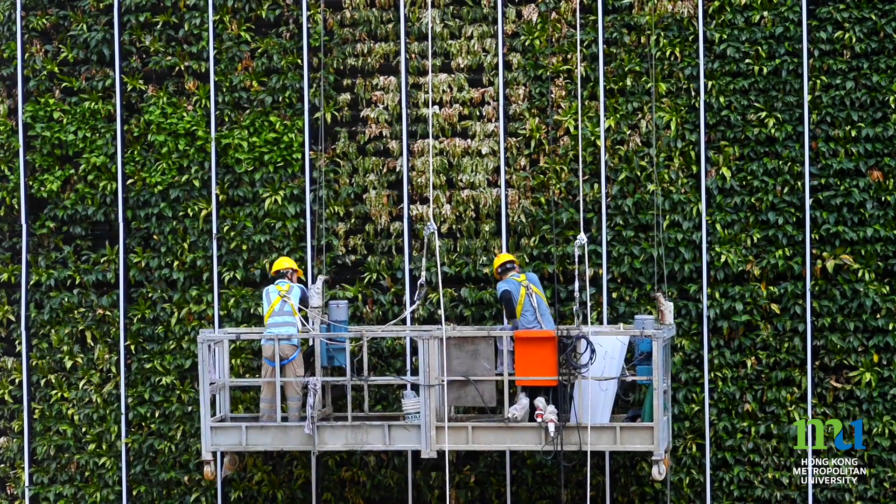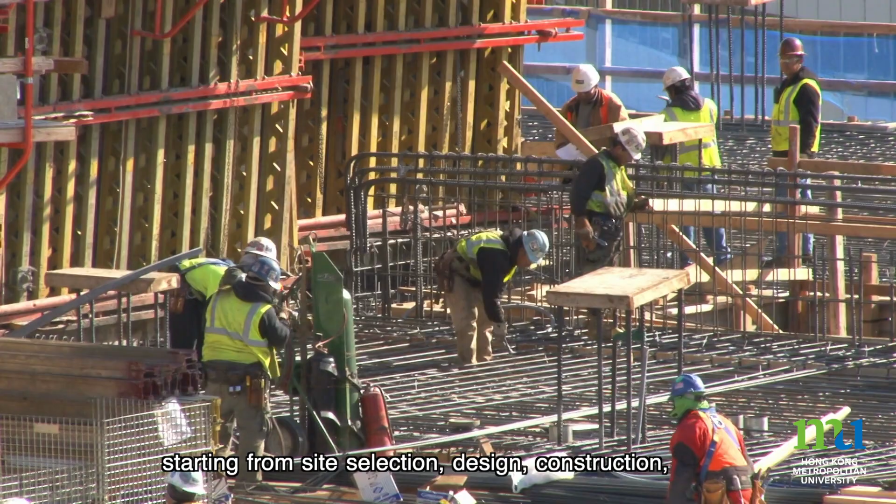Now, let's turn our attention to Kevin Chu, who will shed some light on the definition and significance of green buildings. Many people might associate green buildings with features like green walls and solar panels. In fact, the concept goes far beyond aesthetics. Green building is a comprehensive approach that encompasses the entire life cycle of a building, starting from site selection, design, construction, operation, and even demolition. The primary goal of green building practices is to minimize the environmental impact of buildings while promoting the well-being of its occupants.

In essence, green building is about thoughtful planning and implementation throughout every stage of a building's existence. It involves adopting strategies and technologies that reduce energy consumption, conserve water, promote sustainable materials, enhance indoor air quality, and create spaces that support the health and comfort of the people who occupy them. By embracing green building principles, we can create structures that are not only environmentally friendly, but also contribute to a sustainable and thriving future for both the natural world and the individuals who inhabit these spaces.

As Kevin Chu has highlighted, minimizing the environmental impacts throughout a building's life cycle is crucial. This requires planning carefully and embracing innovative building methods.

Today, we have the privilege of welcoming another distinguished guest, engineer Dr. Conrad Wong, Vice Chairman of Yau Lee Holdings Limited, who will graciously share his perspectives on the construction industry, focusing on how Yau Lee Holdings Limited has been recognized as one of Hong Kong's pioneers in actively adopting innovative methods of construction and building information modeling, or BIM, in their construction projects.

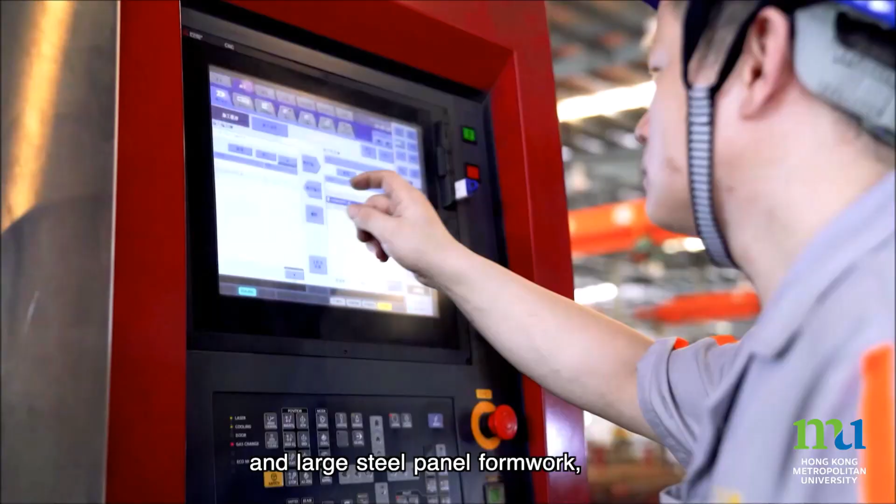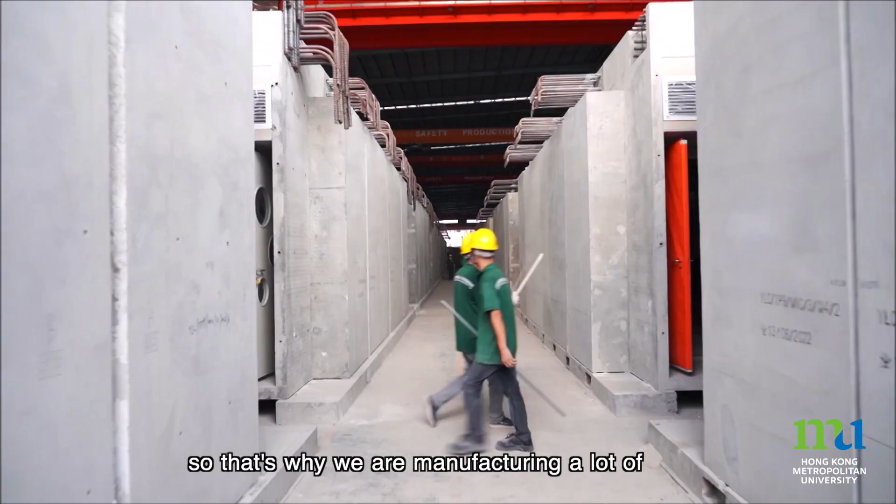We actually, over the same time, Yau Lee start changing the method of construction. We're using a lot more what we call prefabrications and large steel panel formwork. In about 10-15 years' time, we virtually get rid of all the timber that is required on site. And that actually turned into a business. So that's why we are manufacturing a lot of these prefabrication products in China now. So to me, green, doing sustainability, is not only a duty, but also a very lucrative business opportunity.

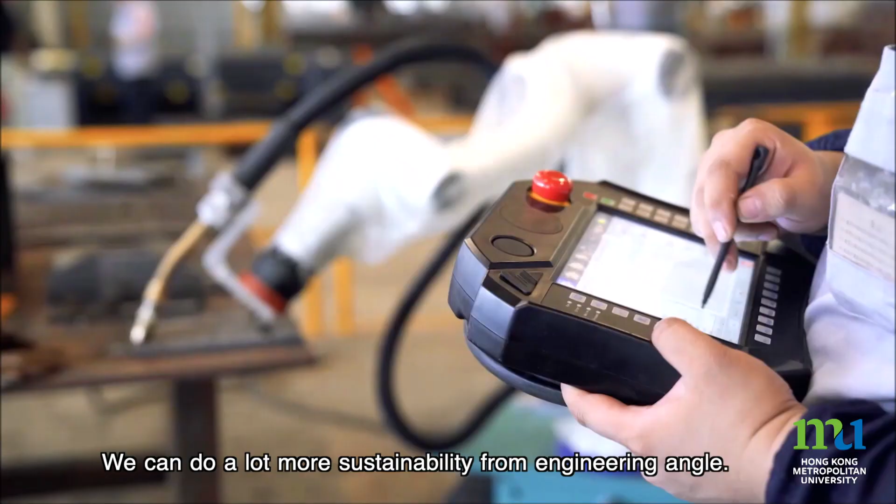We can do a lot more sustainability from an engineering angle. I'll give you a couple of examples. We talk about timber. Now we are using a lot more prefabrication.

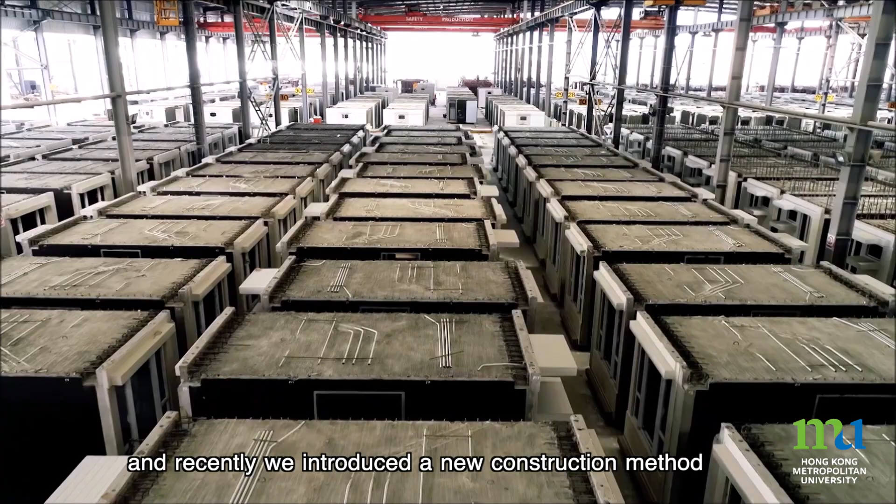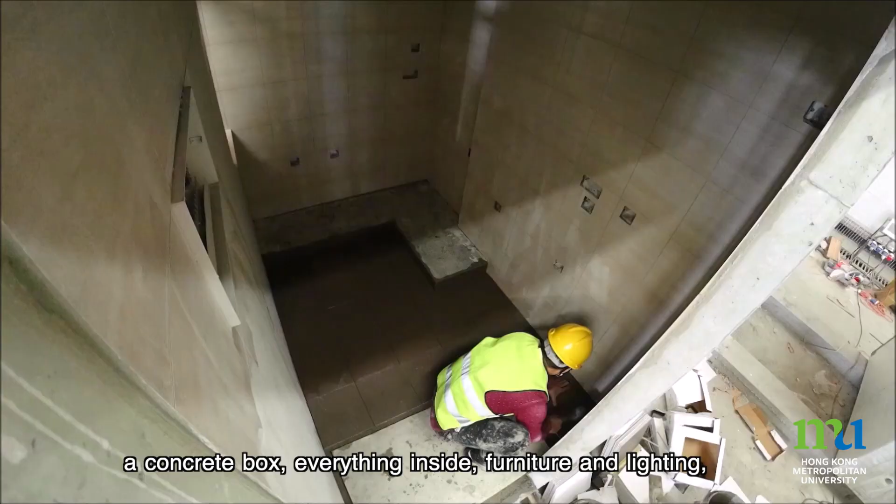Recently we introduced a new construction method called MIC, Modular Integrated Construction. Basically, you build a concrete box, and everything inside, furniture, lighting, tiling, flooring, are all constructed within it. Then we ship the box from our factory in Huizhou into Hong Kong and assemble it on site.

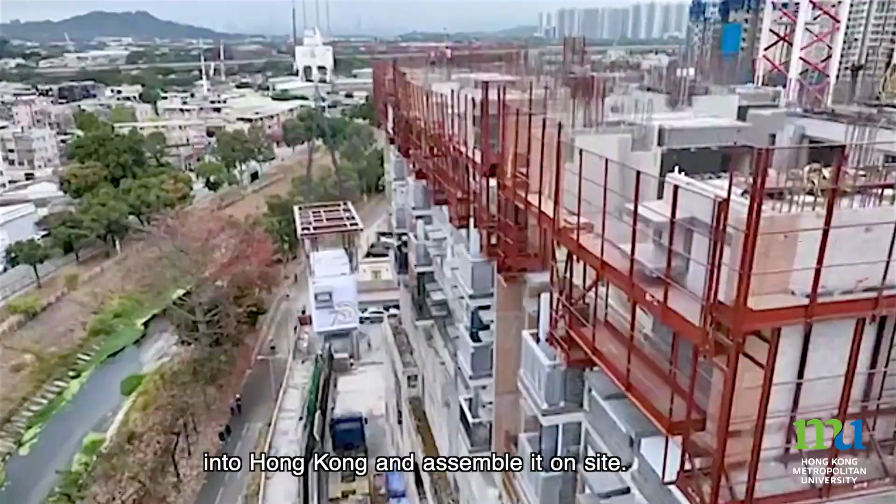So the way I see construction nowadays is like a big assembly plant. All you can think about is a big Lego set. All the components are manufactured in China and shipped to Hong Kong, and then we just assemble them.

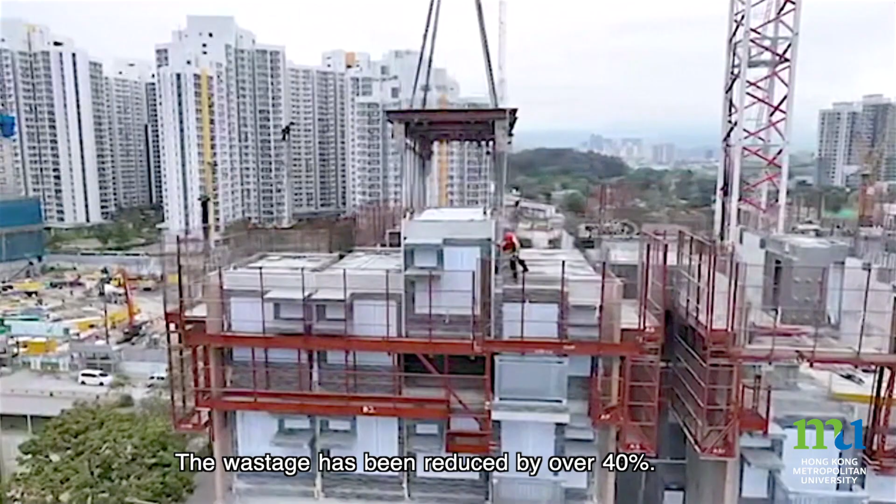This type of construction not only saves a lot of timber, it also saves a lot of energy because the construction period can be shortened by 15 to 25%. So it's a much more environmentally friendly method. The wastage has been reduced by over 40%. So on every single indicator, these construction methods are superior to the current prefabrication methods.

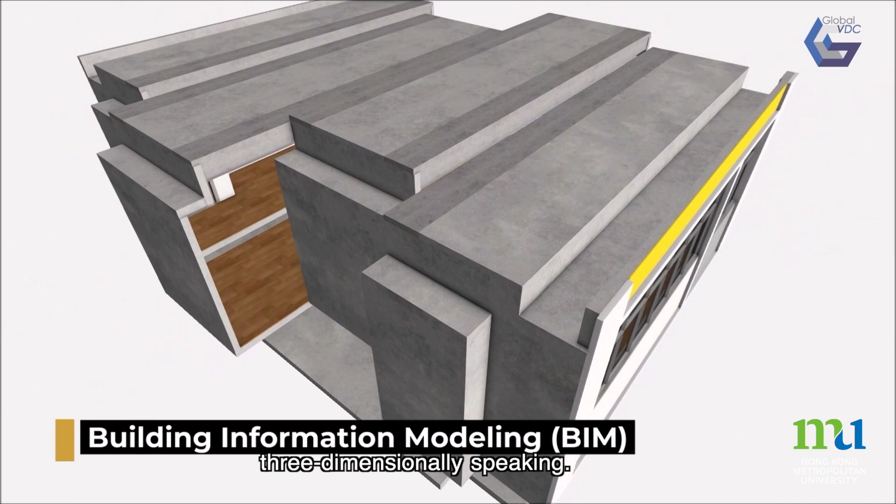We're using BIM, Building Information Modeling. Basically, now what we do in construction is have the whole building designed in computers, three-dimensionally. We assemble the whole building in a computer first, identify all the clashes, and then solve them, what we call coordination, between different parties, before we actually build the real building.

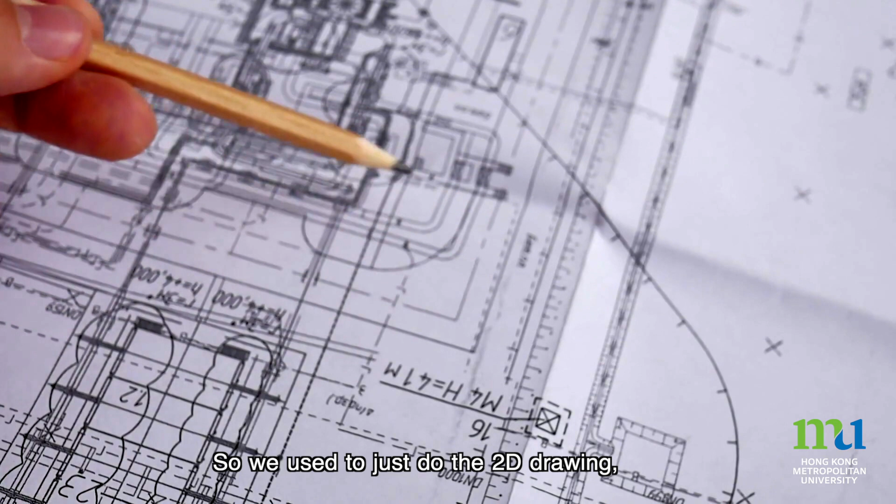We used to just do 2D drawings and then construct the building. Now we do 2D drawings and 3D models in computers before any physical construction. Now it's obvious, everybody's doing it. But say 10 years ago, when I said, no, we need to go into BIM...

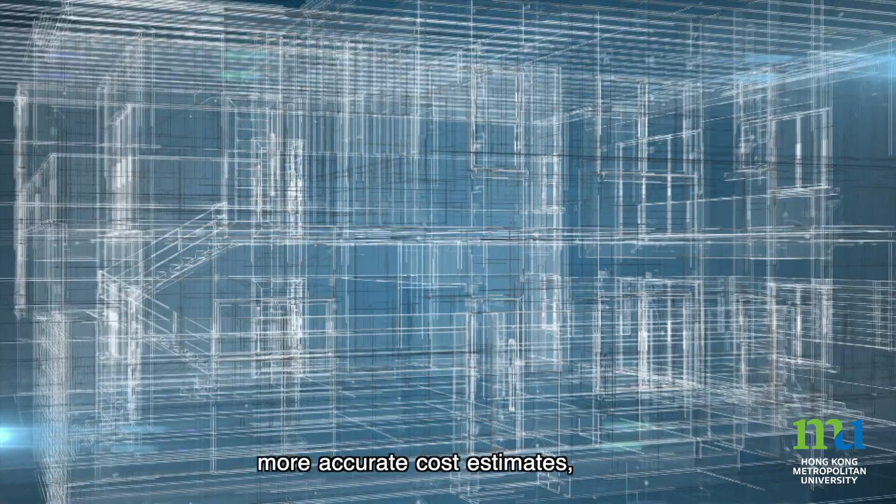BIM enables companies and contractors to make more accurate cost estimates, resulting in significant reductions in material costs, environmental costs, and labor hours. But a key sustainability challenge lies in the carbon embodied within buildings themselves. Embodied carbon includes the carbon emissions released during the extraction, manufacturing, transportation, construction, and disposal of building materials. The building industry has been actively exploring various material compositions that minimize this carbon footprint.

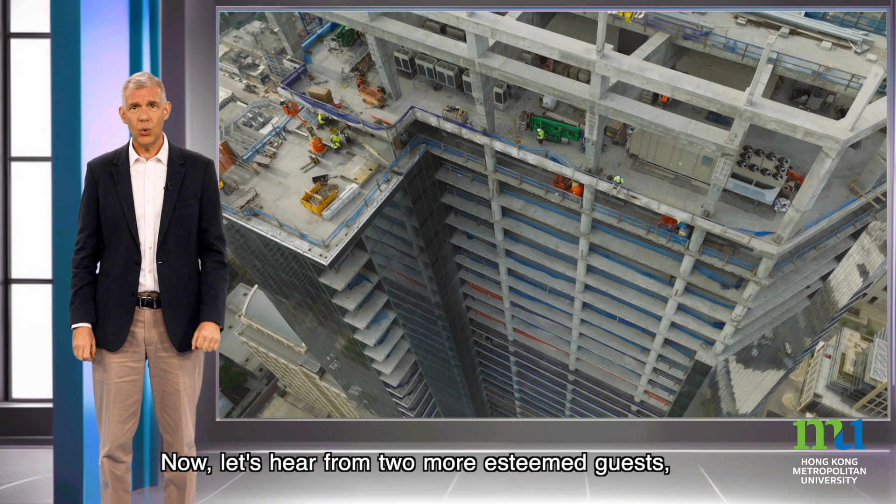Now, let's hear from two more esteemed guests, Mr. Shervin Shargi and Mr. Jim Lam, as they join engineer Dr. Conrad Wong to share their expertise in concrete, which is known to be one of the most carbon-intensive materials used in building construction.

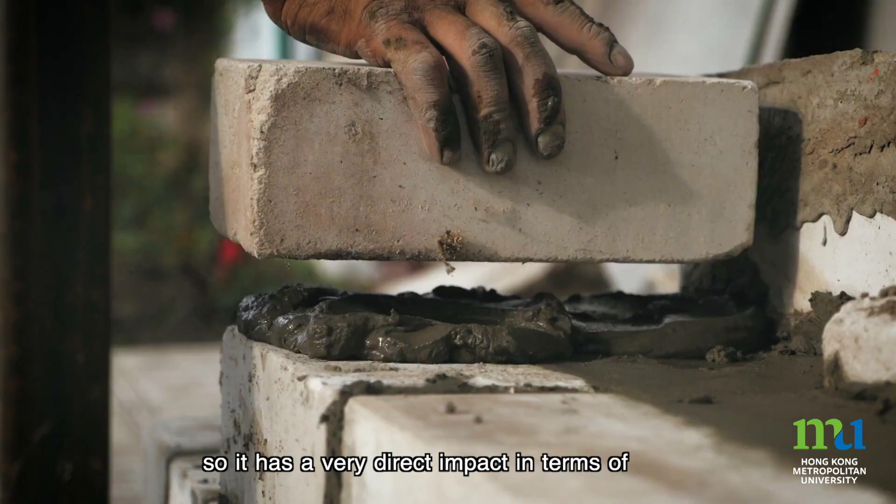Concrete is one of the most carbon-intensive materials we make out of any product or material globally. It's also the most consumed, the most made material by mankind. So it has a very direct impact on climate emissions and atmospheric CO2 levels.

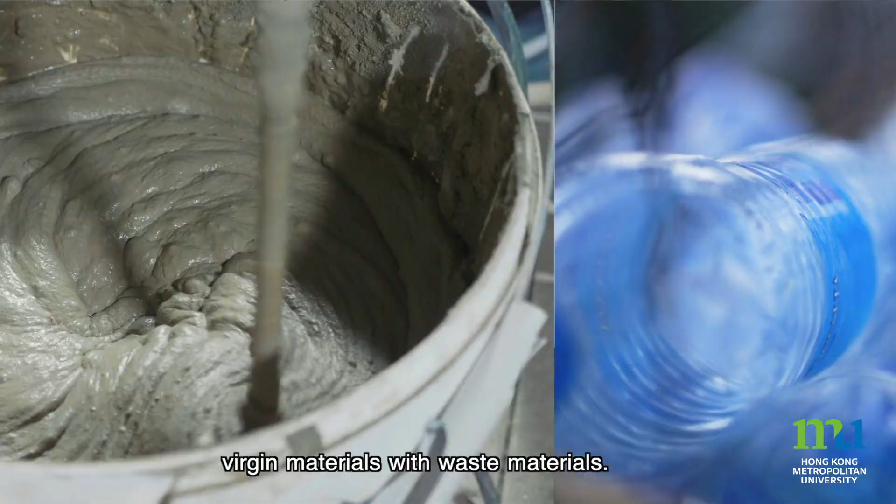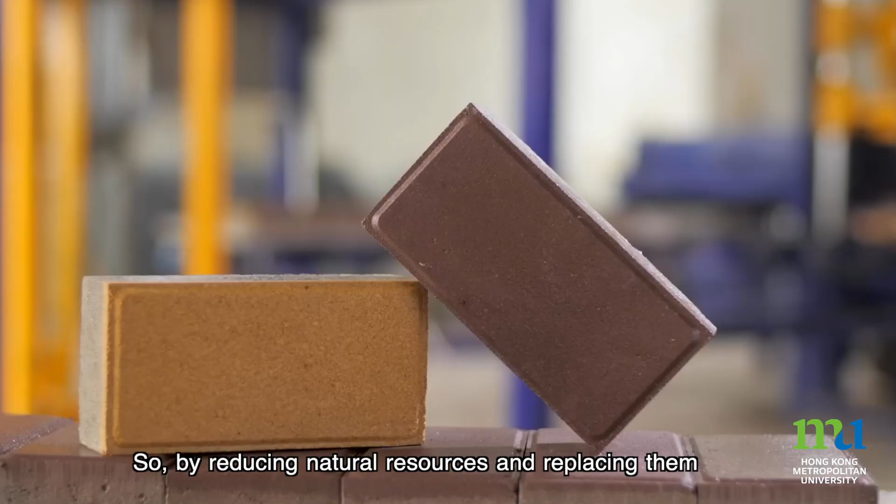What we do to minimize that is firstly replace virgin materials with waste materials, so we don't rely on excavating and transporting heavy raw materials long distances, which has a significant carbon footprint. We use local waste materials, which otherwise would be sitting in landfill, and they travel much shorter distances. So we look at circularity of materials within Hong Kong, and we manufacture within Hong Kong. By reducing natural resources and replacing them with waste, we reduce carbon footprint.

By shortening transportation distances of heavy materials - concrete and the materials that go into it are very heavy, so transporting them generates a lot of carbon emissions, whether by ship or by truck. We actually conducted a life cycle assessment under the ISO 14040 framework, so we have fully quantified carbon footprint saving data versus conventional concrete.

A very large, meaningful proportion of that comes from reduction of transportation distances. We've quantified our carbon savings, depending on the product and our design mix, at between 19% to 41% lower than the conventional concrete equivalent. So we substantially reduce the carbon footprint of our concrete because we use waste materials, not virgin materials, and we source those materials locally, manufacture locally, and the end product is used locally as well.

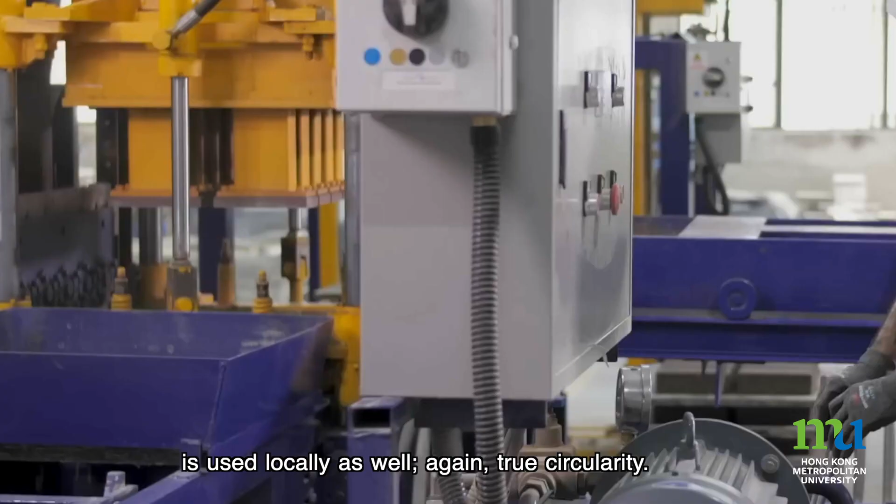Again, true circularity. In terms of waste, we have no wastewater. We have no airborne emissions because we don't heat or melt the plastic. And there are no chemical emissions. So it's actually a 100% clean process. There's no wastage generated by the plastic recycling.

The only wastage we ever create is concrete waste, bricks that, for example, don't pass quality control. But again, we've designed our product to be fully recycled, so we can recycle all of our waste back into new bricks. Our target in terms of sustainability and environmental impact is to minimize virgin raw materials, but also be zero waste - any concrete wastage we produce, we recycle back into new products.

And because of our process, which doesn't involve heating, melting, or chemical processing, there's actually no wastewater, effluent, or airborne emissions from the process. So one of the biggest waves hitting the construction industry, as far as green or sustainability is concerned, is embedded carbon.

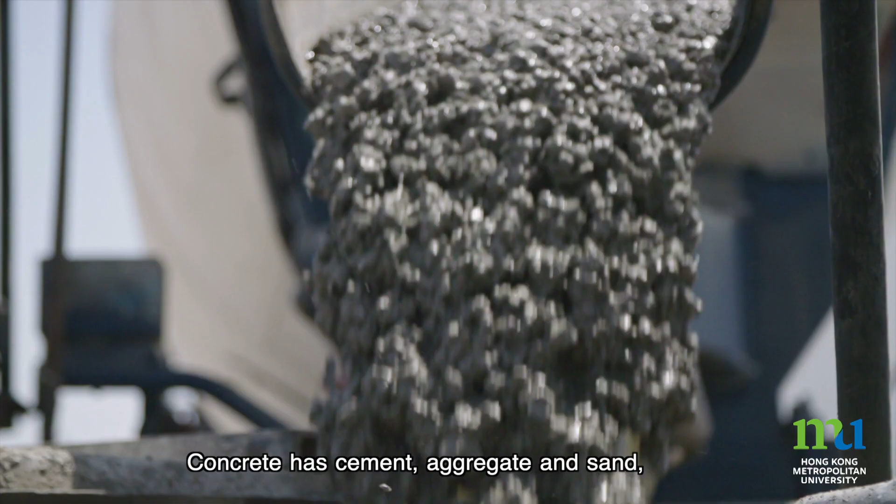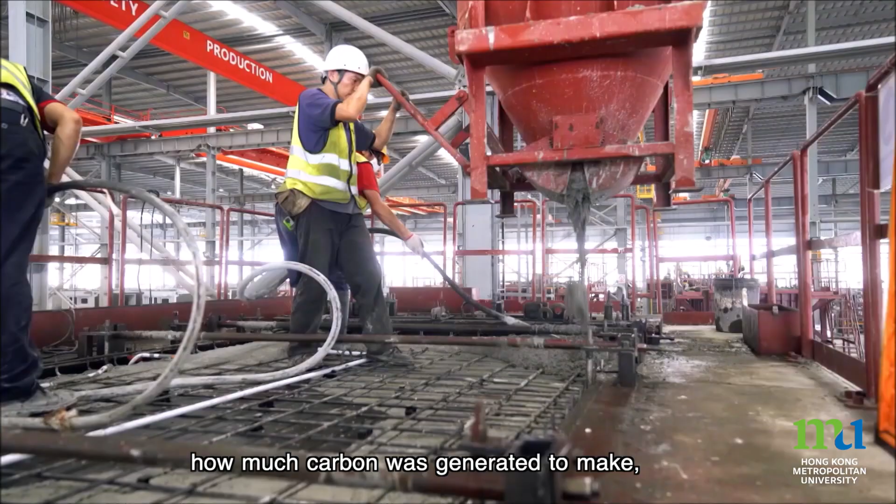So what it means is when we put up a building, we have to calculate the material inside that we used, how much carbon is embedded. For example, concrete has cement, aggregate, and sand. So where does sand come from, where does aggregate come from? During the process, how much carbon is generated to make, for example, 1 kg of cement. So this is embedded carbon.

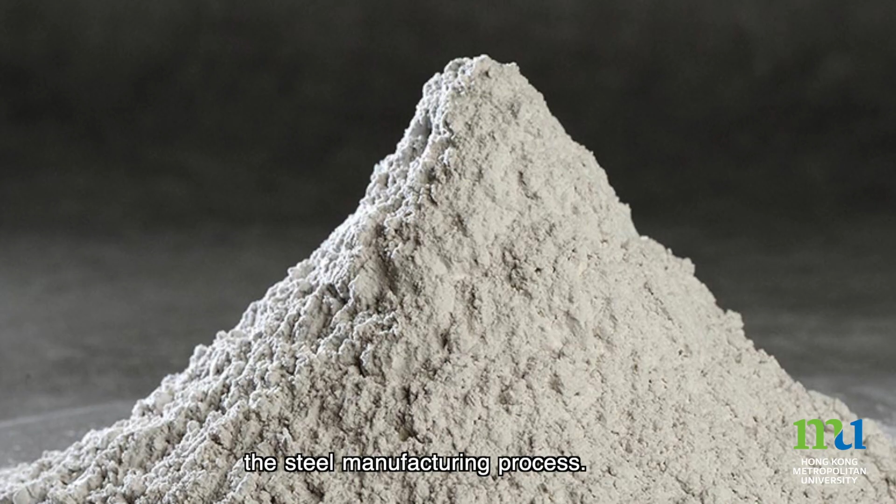So what the whole industry is thinking is how we can reduce this embedded carbon. Take concrete again, for example. If we put fly ash or GGBS, which is a waste product from the steel manufacturing process, into the concrete, you can actually lower carbon emissions, because this waste product in fact has much lower carbon emissions than cement. So in this way, we can lower the embedded carbon.

Decarbonization is one of our key focuses, and NWS is among the first batch of companies joining the Hong Kong SAR government's carbon neutrality partnership.

The first one is about Hip Hing Construction. Hip Hing partnered with a startup company and deployed 16 battery energy storage systems, BESS, at 13 project sites to facilitate the decarbonizing process. BESS is a cleaner alternative as it does not produce point source pollutants and therefore reduces carbon footprint. Hip Hing is one of the largest users of BESS in Hong Kong.

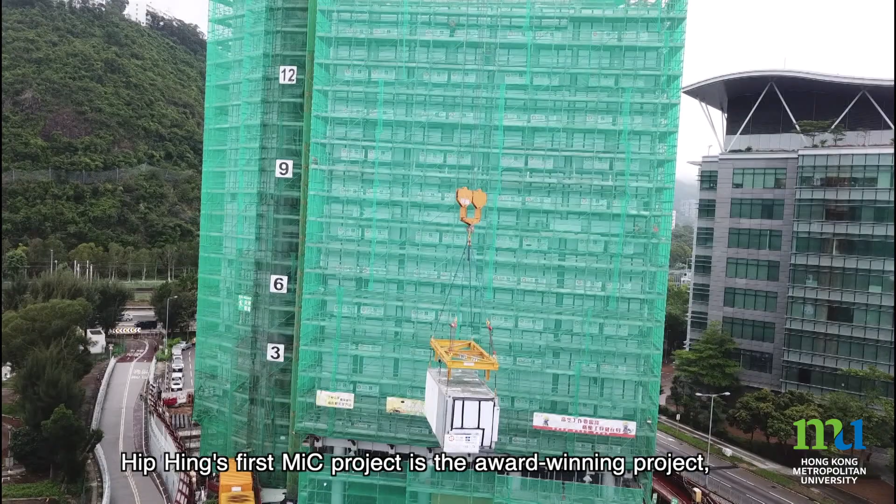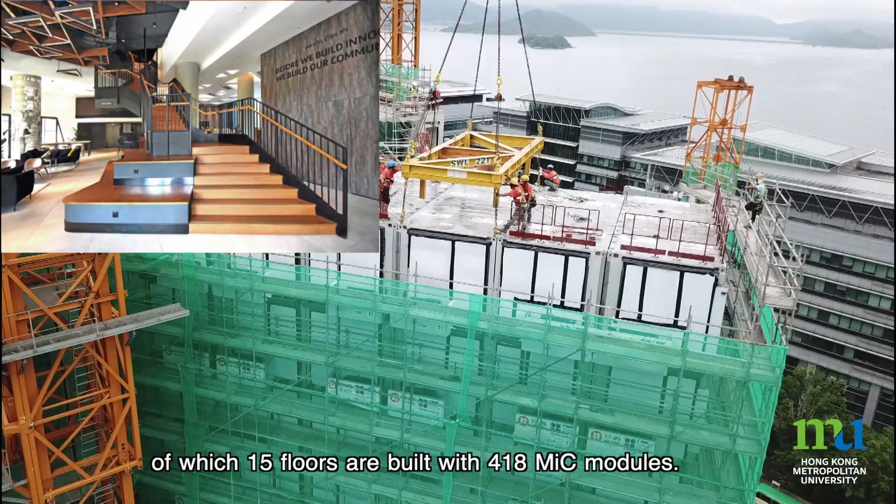Moreover, Hip Hing is also an advocate of MiC, Modular Integrated Construction. Hip Hing's first MiC project is the award-winning InnoCell at Science Park, which is also the first high-rise MiC building in Hong Kong. InnoCell is a 17-story building, of which 15 floors are built with 418 MiC modules. By adopting MiC, material wastage was reduced by 30% compared with more traditional construction methods.

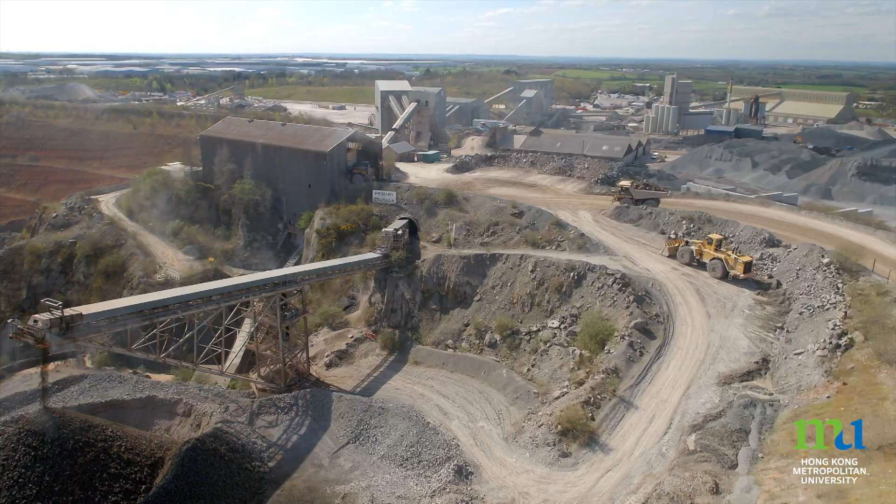To effectively address the carbon footprint resulting from the building process, it is essential to consider both architectural and building services design in order to optimize energy efficiency. By doing so, we can minimize the environmental impact of our buildings. And this is where green building certification systems come into play. These systems provide recognition to buildings that demonstrate exceptional environmental performance. Green building certification tools help us comprehensively evaluate a wide range of sustainability factors throughout a building's life cycle, including energy consumption, water usage, material selection, and waste management.

Each country typically develops its own certification system to suit its specific needs. For instance, the United Kingdom has BREEAM, the United States has LEED, and in Hong Kong, the widely adopted assessment tool is BEAM Plus. Now, let's return to our esteemed guests, who will share their insights into how they have incorporated these certification systems into planning their university campuses, hotels, and stations. Their experiences will shed light on the ways these sustainability frameworks have influenced their projects and contributed to their overall environmental goals.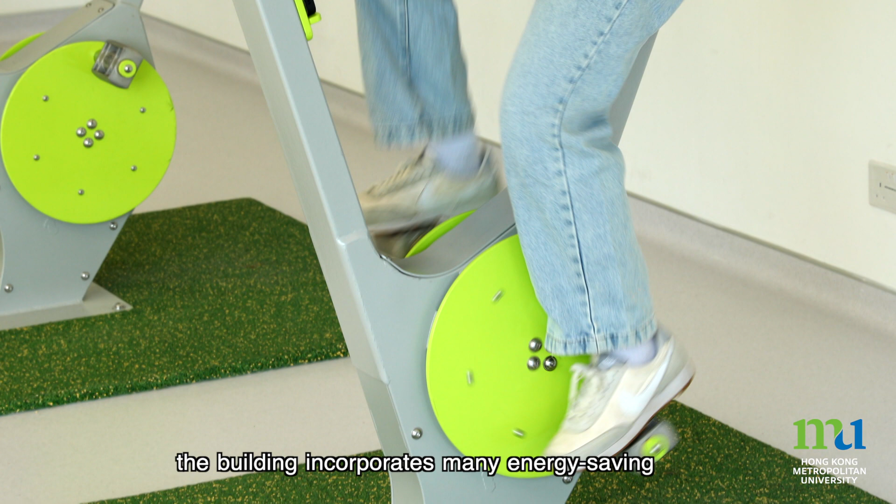Hong Kong Metropolitan University Jockey Club Institute of Healthcare was accredited with a BEAM Plus Final Platinum rating by the Hong Kong Green Building Council for its green campus design. Officially opened in January 2021, the 13-story building is located at Sheung Shing Street, Ho Man Tin. With over 30% of the site area covered with greenery, the building incorporates many energy-saving and environmentally friendly facilities.

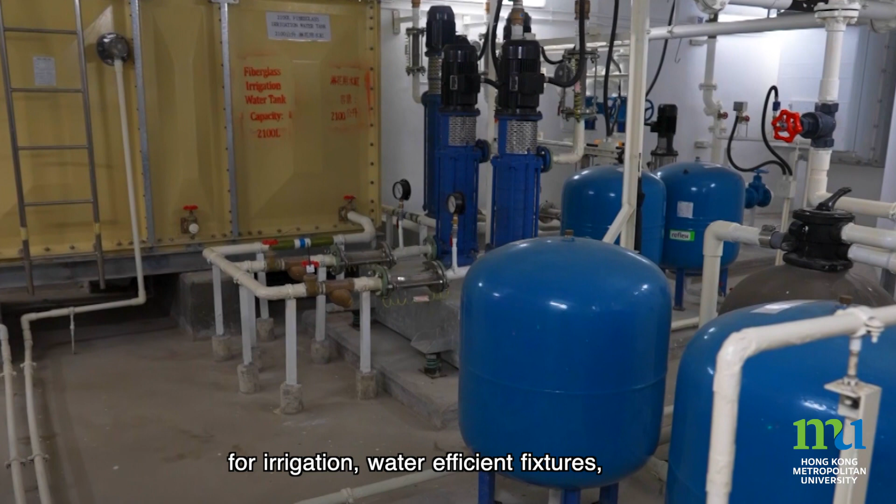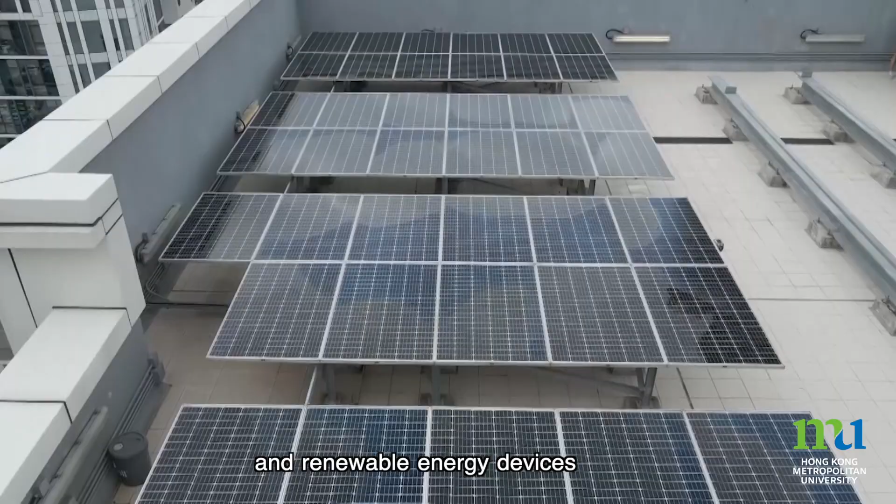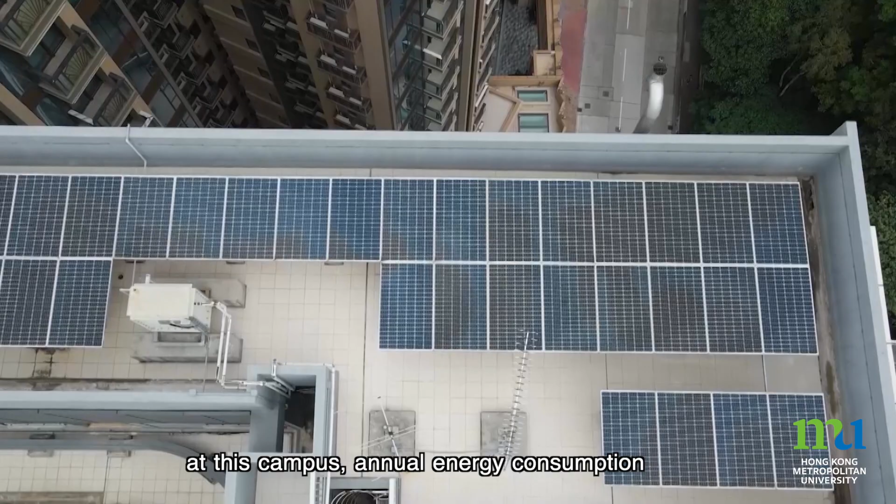Some examples are the rainwater harvesting system for irrigation, water-efficient fixtures, and air quality enhancement devices. Energy-efficient light fittings and renewable energy devices, such as a solar energy system on the rooftop, are also installed. By selecting proper material and highly efficient equipment at this campus, annual energy consumption is reduced by over 1 million kilowatt-hours, about a 24% reduction from the baseline model.

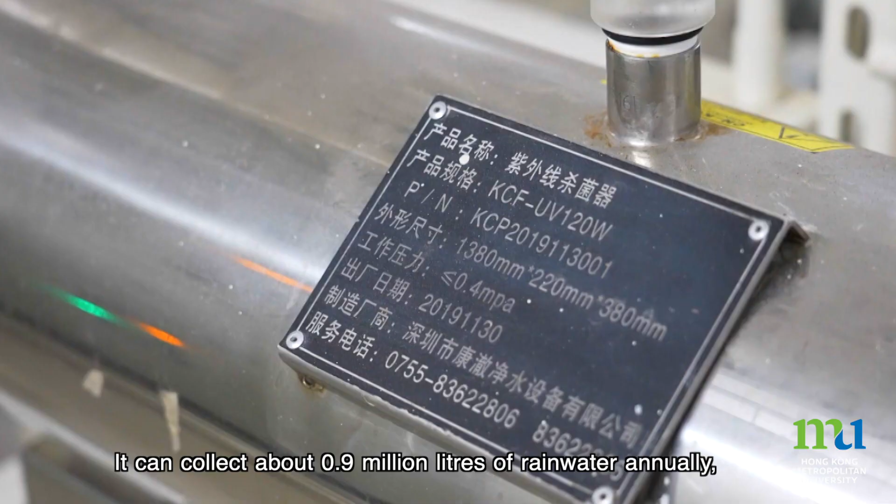For water usage, we have procured sanitary fitments that could reduce freshwater consumption by about 6.5 million liters annually. In addition, a rainwater harvester is also installed to collect rainwater. It can collect about 0.9 million liters of rainwater annually, which will be used for landscape irrigation instead of fresh water.

In terms of building design, this campus is a curtain wall building. We used low-emission glass and insulated glass units to lower the solar heat gain while maximizing natural daylight into the building without bringing extra heat. Less heat from outside means less burden on the air conditioning system, hence less electricity is used.

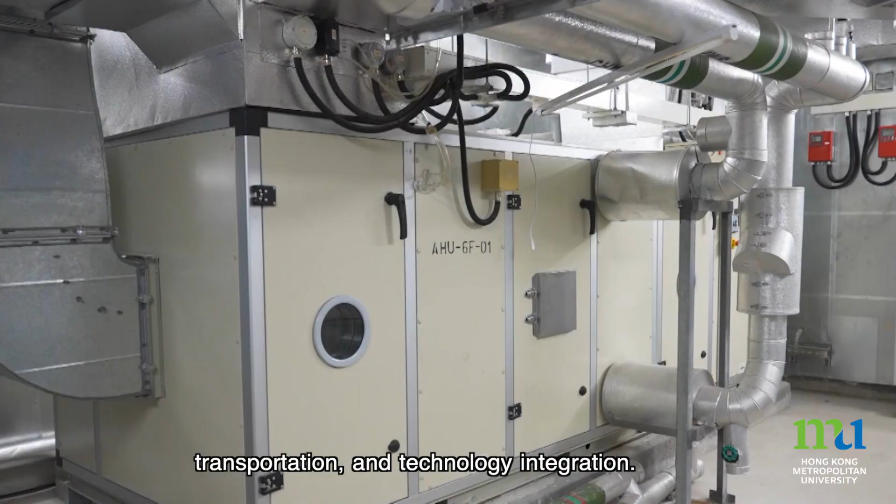Sustainability development involves many aspects of work, including energy saving, water saving, human comfort, greenery arrangement, material selection, transportation, and technology integration. All of this requires different professionals to collaborate to achieve the goals, and it takes time to manage. It's also very challenging to get the right balance for achieving functional and sustainability requirements while controlling them within the budget. For instance, we want to have more green space or plant rooms to house equipment for green features around our campuses, but could only add a little because of limited circulation space.

As you know, space is precious in Hong Kong, especially at our university. Sustainability development is also a continuous process, and it needs an ongoing commitment of resources allocation to maintain the original target. We also strive our best to promote energy saving.

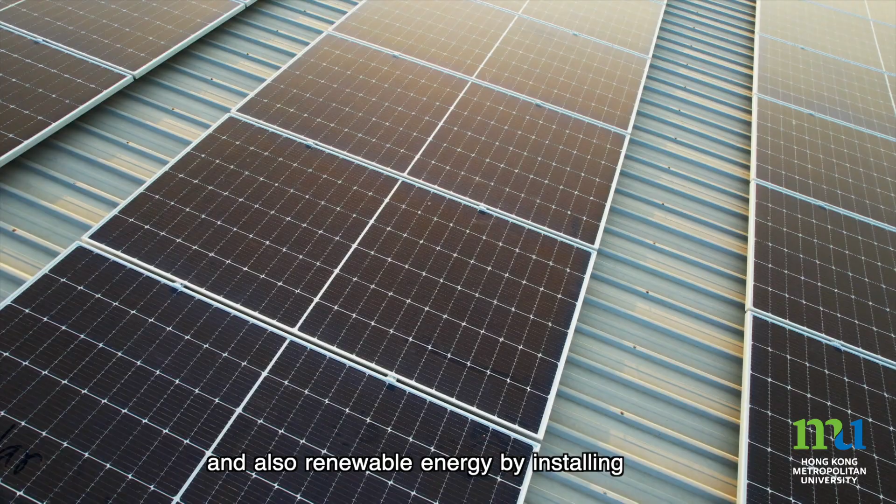If you look around the hotel, you can see that we maximize the use of natural daylight. We also have a grey water recycling system, and renewable energy by installing over 121 pieces of solar panels on our rooftop. Sino Group is one of the 5 developers to pledge towards net zero carbon.

We set interim targets to reduce our energy use, including 2030 sustainability vision goals, as well as striving towards net zero carbon. But this is a journey that we need to work harder together.

Looking at the Fullerton Ocean Park Hotel, we have an array of decarbonization strategies. For instance, we have EV chargers available for our hotel guests. When they park the cars, we hope to promote EV charging facilities.

In addition to that, if you look around our hotels, we also ensure to have natural sunlight so that we can help reduce energy equipment. We do have energy monitoring and energy sensors as well that can also help to reduce energy use.

Circular economy is a big step towards decarbonization. So we work with EcoBricks to have an EcoBricks footpath, which helps reduce the embodied carbon during the construction stage.

In about 2011, I became the chairman of the Hong Kong Green Building Council. So I got involved with a lot of green buildings. How do I promote green buildings? I want this hotel to be as green as possible, using as little energy as possible.

After a few years, we built the hotel. I think it's one of the, if not the, greenest high-rise hotels in the world. We managed to cut down close to 60% of the energy. In fact, the actual figure is 58.5%.

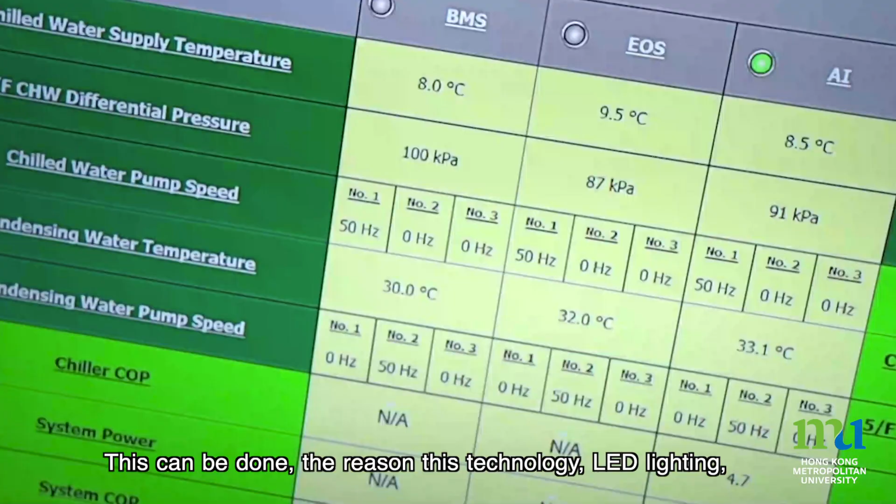So we managed to cut down close to 60%, and we showed the industry this can be done. Using this technology, LED lighting, we have one of the largest hot water panels in Hong Kong, and we use something called a heat pump, which uses, for example, the waste heat from the air conditioning system to heat up the water.

So basically, we don't need any burner to heat the water up at all, most of the time. Maybe 2 or 3 days a year we need to turn the boiler on, otherwise we don't need to turn it on at all.

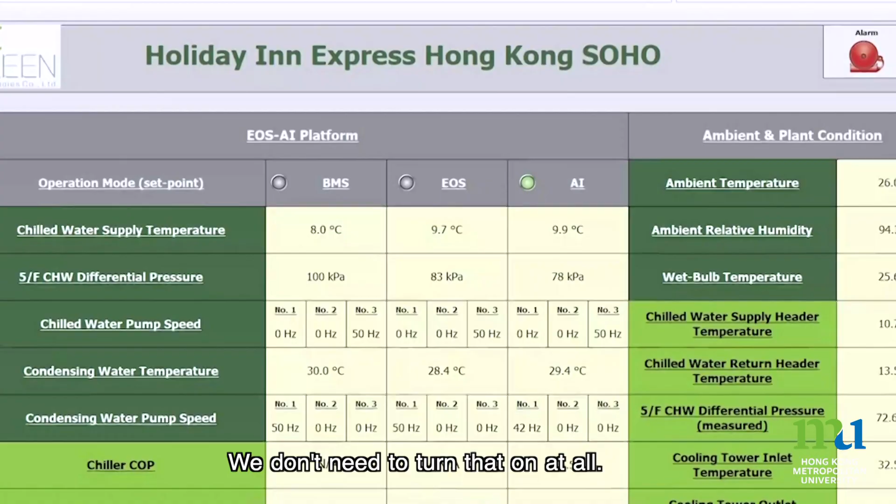And we have a lot of the newest IT systems. We managed to get hold of a professor from PolyU to develop an AI system controlling the air conditioning system in my hotel, which cut down another 25% of the energy from the air conditioning system.

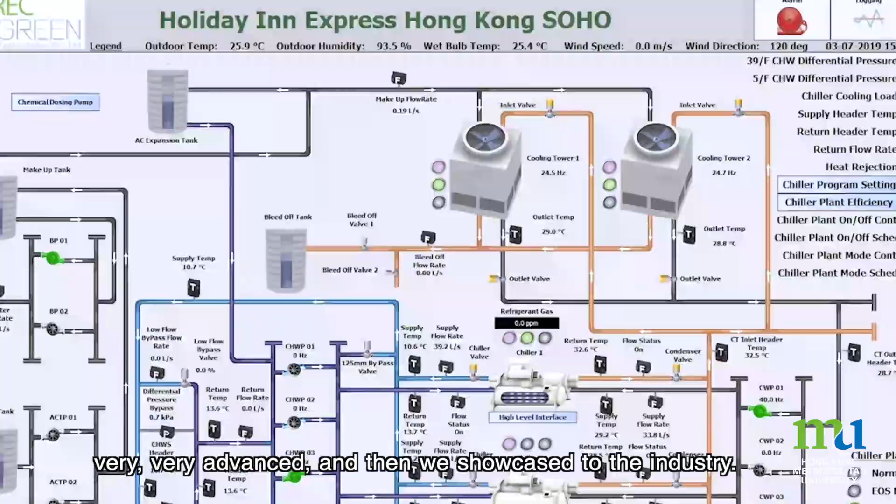So we did a lot of things, and it was, at that time, very, very advanced. We showcased it to the industry. I give them my energy bill, so they can see this can be done. I tell them that green is not a cost, but an investment.

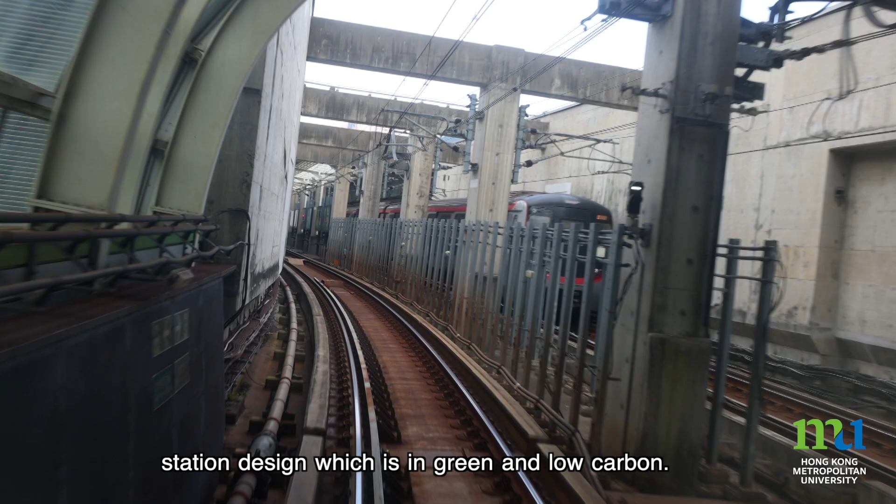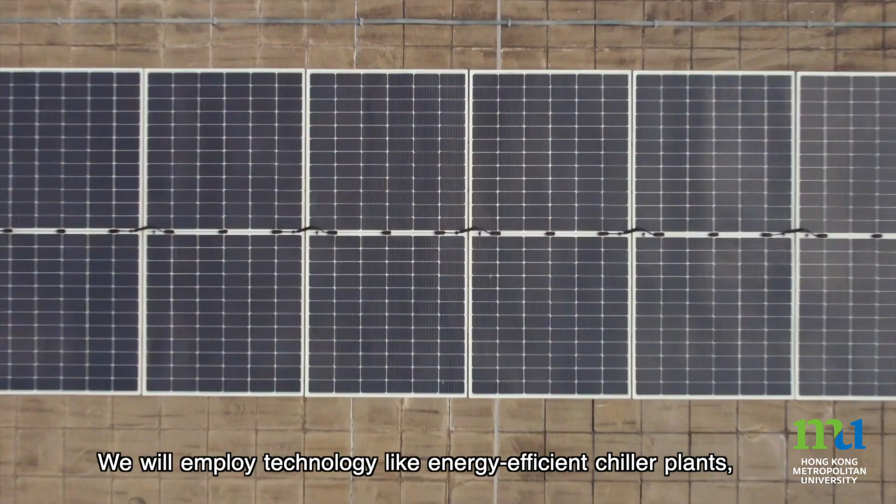As a station architect, I have the role to deliver station design that is green and low carbon. It's our aspiration to keep cities moving sustainably. All our new stations are designed to be environmentally friendly from the outset. We employ technology like energy efficient chiller plants, solar cells, and, where possible, naturally ventilated stations.

Hin Keng Station is an above-ground station. We have heavily crafted the design of Hin Keng Station to blend with its surroundings, integrate and connect with existing district facilities. Also, the design of Hin Keng Station maximizes the use of natural daylight and natural ventilation.

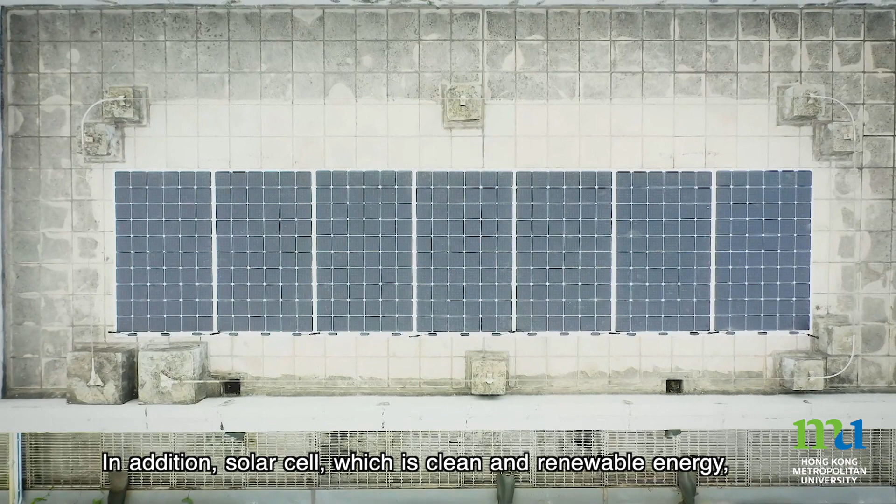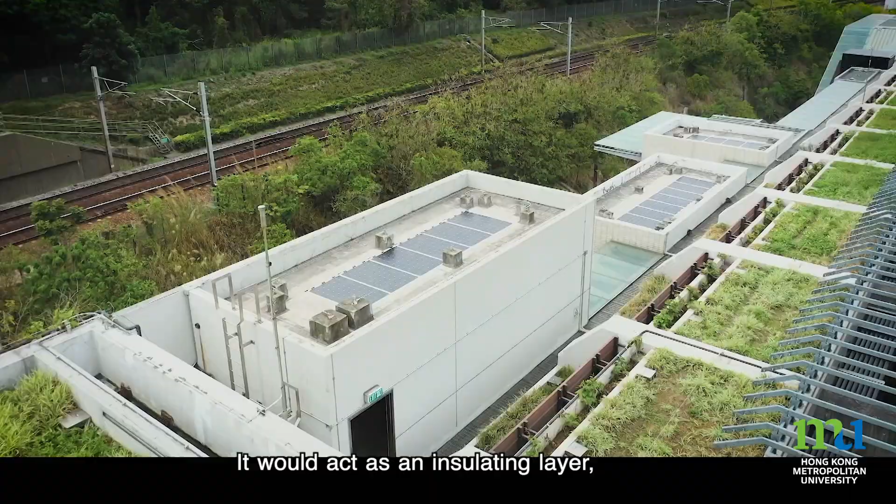To achieve this, we have done cross-ventilation, with sun shading devices on the roof and on the side of the 2 platforms. In addition, solar cells provide clean and renewable energy supporting our station operation, reducing our overall carbon footprint during operations. Another feature of the station is an extensive green roof of 5,000 square meters, which acts as an insulating layer, minimizing heat transmission into the station.

On top of connecting mobility, we are keen to utilize the unique location of our green station in harmony with the beautiful settings of nature, and in harmony with what happens in the surroundings, contributing to the well-being of the community.

Apart from our stations, we also incorporate green building designs in our property developments. We're delighted that over the last 2 years, 8 properties in our portfolio have achieved BEAM Plus Gold or Platinum ratings from the Hong Kong Green Building Council's BEAM Plus scheme. Going forward, we've committed to all of our new stations and property developments achieving at least a BEAM Plus Gold rating.

At this point, you should have a much deeper understanding of the tremendous efforts our speakers have made to achieve sustainability and the significant challenges involved. Embracing innovative products and practices in the building industry is no easy task. It requires firm commitments to new technologies and approaches. And speaking of such advancement, our speakers make a convincing case that businesses must take the lead in driving meaningful change. Let's continue to learn from their insights as they explore the role of businesses in spearheading change and leveraging sustainability challenges as valuable business opportunities.

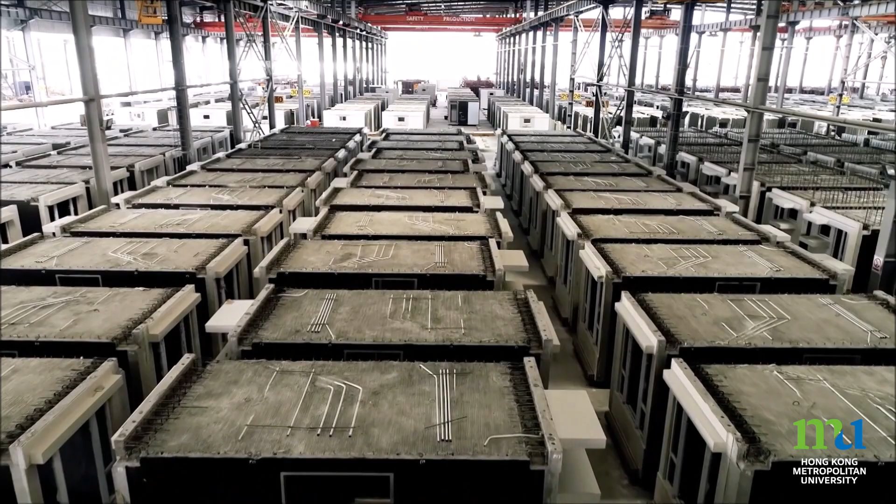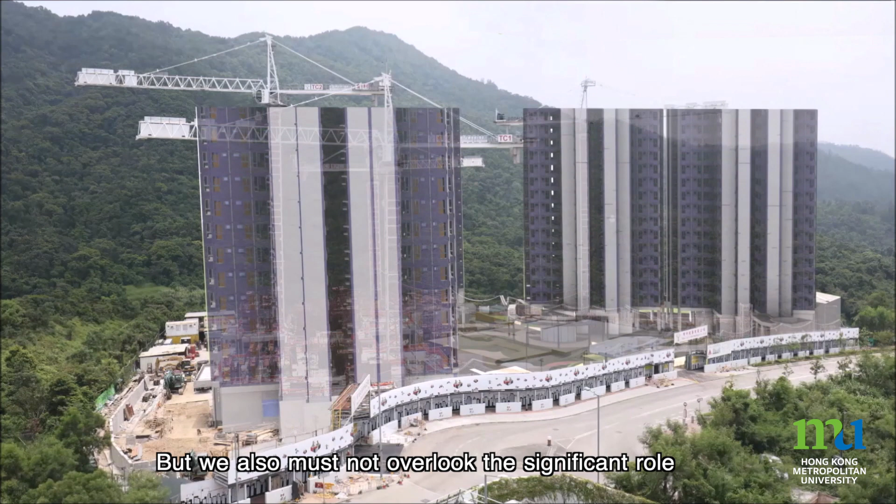It has been inspiring to witness the commendable progress made towards sustainability in Hong Kong's building industry. But we also must not overlook the significant role Hong Kong's government has played in this journey by implementing a range of incentives to encourage building developers to embrace sustainability practices. For instance, capital expenditure incurred in the installation or construction of energy-efficient building systems qualifies for profits tax deduction. In addition, buildings participating in the BEAM Plus scheme are granted an increase in gross floor area, or GFA, of up to 10%, allowing for the inclusion of balconies, prefabricated external walls, common corridors, and clubhouses.

While we appreciate the efforts made by industry and the government in developing a sustainable built environment, one in which buildings are designed for longevity, flexibility, adaptability, reuse, and recoverability, we must also confront our own responsibilities as owners and occupants. We too can contribute by taking advantage of our building's sustainability features, reducing our consumption of electricity and water, and minimizing waste, both at home and in the workplace.